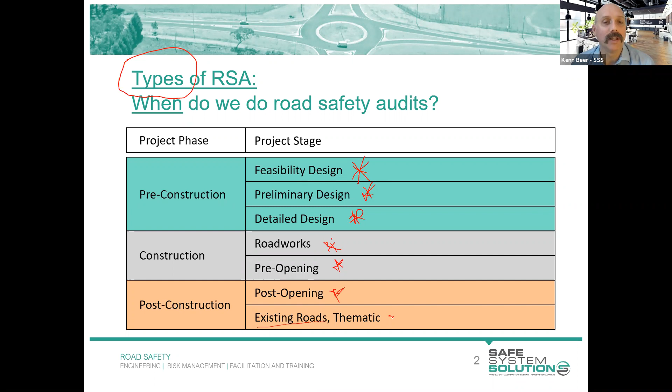What we want to do in this session is talk about the steps within any of those road safety audits. We use the same 8 steps within any audit, be it a detailed design audit or a construction site audit - it's the same 8 steps. You're just dealing with different information to be able to do your audit. So we're going to define those, have a look at them, and point you to where you can get further information. Then we'll dive into the first of our specific road users we'll have a detailed look at - today we'll be talking about pedestrians and safety considerations when road safety auditing for pedestrian safety.

Okay, so road safety audits - it's a fairly straightforward process, and once you get to know it, it becomes run-of-the-mill doing these audits. It's got 8 main steps that we go through. It does take time, there's no getting around that, because you have to go through these 8 steps, and if you've got a large design set, you need to go through that with a fine-tooth comb. They really do add value to projects at any stage, and need to be an integral part of a design process - that independent check, the audit, to ensure and guarantee the safety of the public.

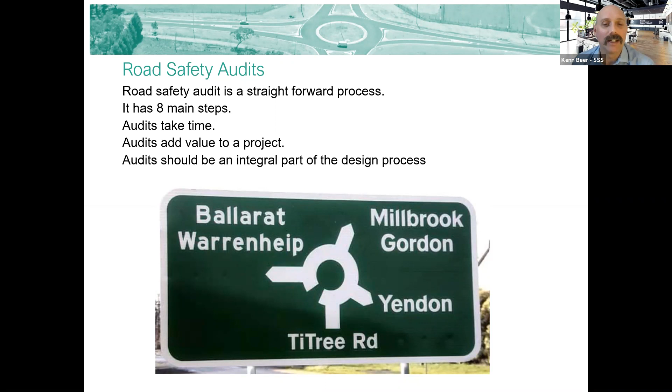So this diagram is from the Austroads Guide to Road Safety Part 6A, which is where you go to get information about how to do a road safety audit - the process of auditing. You don't get all the details of everything you might find as an auditor, because that's limitless and requires a whole lot of knowledge and continual learning. But the steps are laid out in this diagram, and I'm going to go through each of those with you.

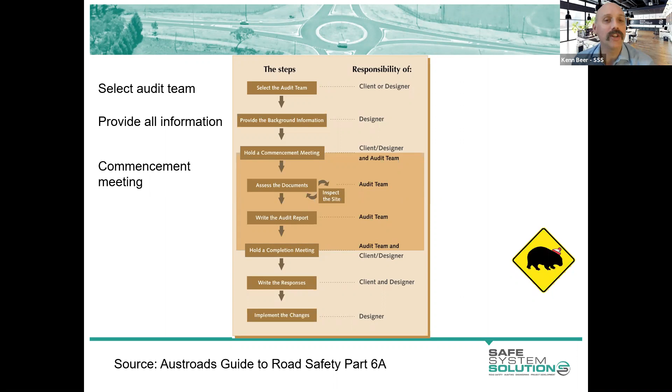But they are essentially to select the audit team - the client is going to do that, or the designer or the project manager, and they're going to get their audit team. They're going to give them all the information they need to do their audit. There'll be some sort of commencement meeting or information exchange. The audit team will then look at the documentation in detail, then inspect the site during the daytime and the nighttime. They'll write up their audit report, and there will be some sort of completion meeting or handover of the report and findings. Then the designer, project manager, or client are going to have to respond to the audit report. I'll talk to you a bit about each of these in more detail and how they actually play out.

But those are really the steps that we go through. This last one here is really critical to why we do audits - that something is implemented. If there's no intention to ever change anything in the design, getting an audit done is a waste of everybody's time and resources. We need that genuine desire to improve things and be open to implementing changes as the auditor recommends, as long as they can be done within the scope of the project. So I really get quite annoyed at audits that are an absolute tick box exercise, and nobody ever had any intention of doing anything with the audit when it came in, apart from putting it on the file and ticking the box to say they did an audit. If it's gone down that track, just don't waste the resources in doing that.

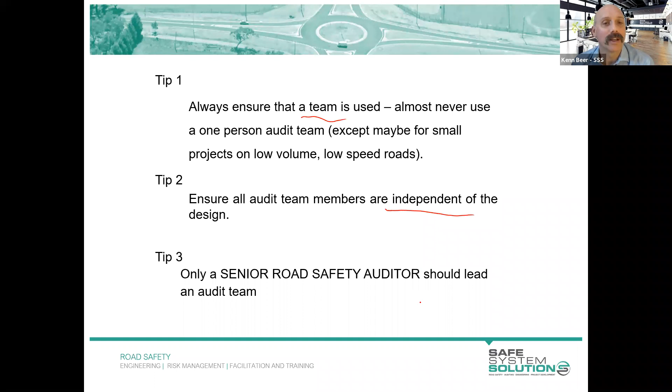Now, in an ideal world, your team will be quite varied. They'll have a broad set of road safety experience. There'll be a mixture of professions, mixture of ages, empathy with all road users, male and female perspective on things. So that would be ideal.

In practice, it's sometimes hard to pull that very diverse team together, but this was a team that I was doing an audit with. It was actually a thematic road safety audit, a motorcycle audit, and we had the three of us there doing the audit, all male, all about the same age, and all with a fairly similar background, traffic engineering and the like. So we asked Wendy to come along, who comes with a very different perspective of things, and add that diversity to our team. In fact, Johan, who's there, is in this course. So there you go.

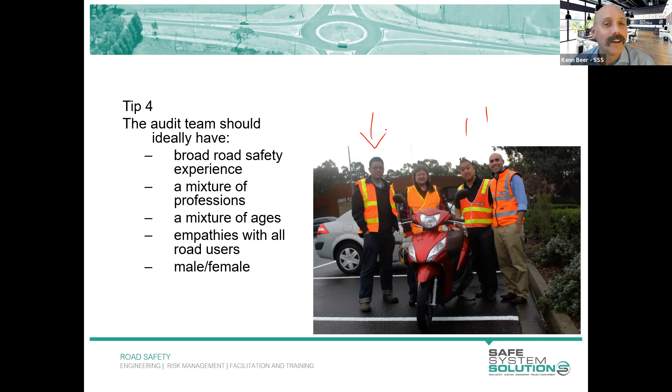So you want to then assess the documents, and as I mentioned, this can take a long time. If you're pouring through a 500-page design set with the full works, you're at your desk for a long time, and you might have multiple people doing it, so you're picking up different things.

For me, when it's these detailed design road safety audits, I tend to get our real design experts involved, who are good road safety auditors as well. The reason for that is they're able to quickly pick up geometric deficiencies out of a 20-page cross section within about 10 minutes, where it would take me days and days to pull that all together. So this reinforces the importance of pulling that team together of varied expertise.

You want to inspect the site during the daytime and the nighttime. There may be specific circumstances where your client, the designer, or the project manager specifies we don't need a nighttime inspection. They might do that to try to save some money on the audit, though it doesn't save them much at all. Maybe it's a speed thing, wanting it done in a quicker time. The Austroads guide does have a little get-out clause saying that in some rare circumstances you could skip the nighttime inspection, but it pretty much says you should be doing one.

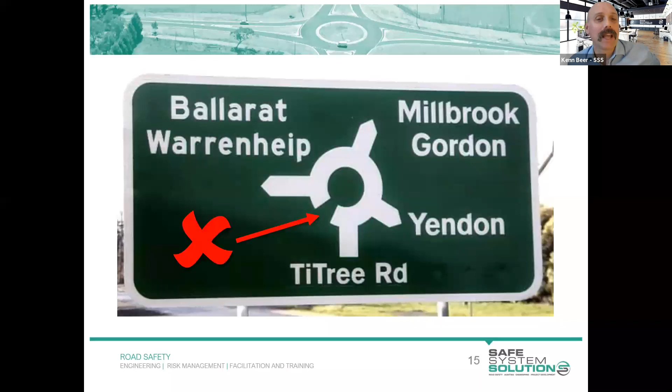I might do that with other things as well, like things that are not directly road safety related for some reason, could be a land acquisition issue or something like that. I might say 'to note' - just flagging with you that this issue is there - instead of risk rating it as one of those specific findings. But you can put that in there as low risk if you believe it's low risk, or you might even bump it up a little bit.

The thing is with this sort of stuff, it gets changed - it's easy to change, and that's a good thing. Yeah, so this one got rectified. In fact, I usually have a photo of the rectified sign - after I ran the audit course in Ballarat and showed them their sign, they got out there, and within the course it was fixed, which was good.

So then you go and write your road safety audit report, and there is a general template that is used, and we want that consistency in auditing. We've provided you a Word document template of an audit report that conforms with the Austroads Guide to Road Safety Part 6A there in Moodle on your memory stick.

So you've got one you can use to ensure you're covering off all the things that should be in there. When we get to the point in this course when you go out and do a road safety audit, you're going to use that and fill it out. We happily give that to you because we want that consistency - we want you to use it going forward, put your own branding on it, and use that general format.

Then we want to see in there a description of the audit and the stage the audit's undertaken, a list of the information provided to the audit team. This one is really important - list not just what was provided, but the details of it, in terms of the design number, the revision, and the date of that design.

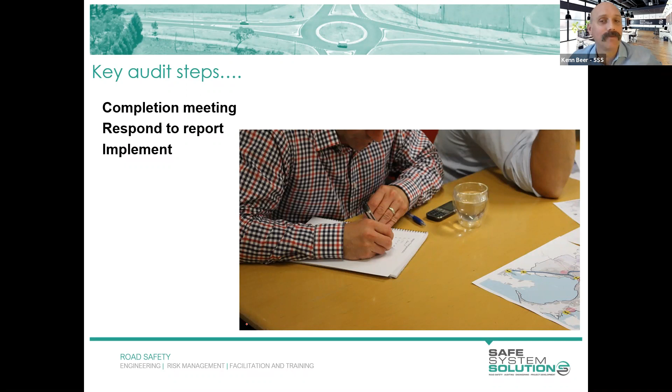It's really good practice for that to be fed back to the road safety auditor, so the auditors have got that full rounded picture of what's going on, but there's no specific requirement. The auditors are simply handing over advice to the project team, and it's up to them as to what they then do with that. But as we talked about, we want to implement, hopefully.

Yeah, so when it's given over to the project manager, this report or the designer, it's important that everybody keeps file copies of that. It's an official document, and can and does get used down the track.

So the project manager is required to respond. It's a vitally important step, and that's what I was talking about, where sometimes it's a tick box and an audit report gets handed over and they just pop it into the file and carry on. But it really needs to be something that's done.

The project manager, the designer, when they get that report, a few little things if you're in that situation: your response may become public, be aware of that. So it's probably thinking about the language you use and how you respond to different things. And it's good to respond to the audit team - that's good practice, it's not absolutely required.

The audit has been done to reduce the risk of a project. And there's a misunderstanding, I think, a common road safety audit misunderstanding, that anything the auditor says must happen. That's a misunderstanding - no. The audit is a report that is there to assist the project team, to advise, but it's their project. So if you're the project manager, the designer, it's your project.

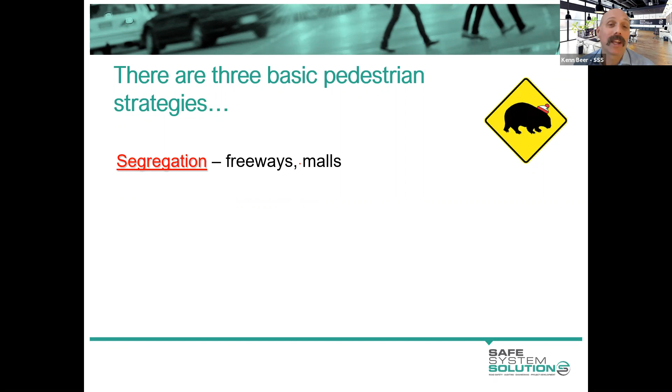So there's these general strategies, these three general sort of broad categories of ways to cater for pedestrians. We've got segregation, separation, or integration.

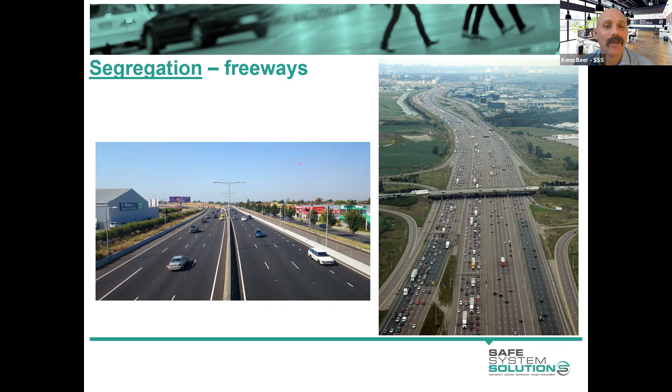And what these are: things like freeways or malls when we're segregating. This is an area where pedestrians are not allowed, right? And you try to do everything you can to keep them out. We may also have it the other way around. This is an area for pedestrians, and we keep vehicles out as much as we can.

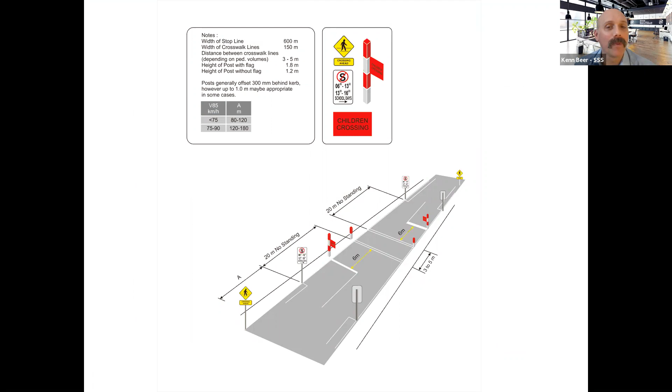Separation is where you're often using the same piece of road during one time for pedestrians like this, and then at another time, very shortly after, it will be used for vehicles. So that's that separation in time. School crossings are also trying to be in that category of separation in time. So we shouldn't have the two using the same thing at the same time. These types of crossings where people go all different directions also, again, separation in time.

Now, I'll give a prize out for the person who can tell me the name of a crossing where you're able to cross that way, or that way, all at the same time. And I want the, I suppose, official term for it.

There's a so there's a couple of terms. My favourite is Flinders and Elizabeth by Adam. Is that the official term? That there is one there. Well done, Adam. No, so I'll give two prizes out for this. I'll give the sort of generally commonly known term, which is a scramble crossing. So whoever got that, I see that's come in a few times. But there's another one which is a bit more obscure.

Does it involve dancing, Kenn? It does involve dancing. It's the name of the person, I think, who came up with it in the UK originally. I'll let that go. See if anybody comes up with that. Yes, Rafaela has got it. It's a Barnes dance. Well done. I think Rafaela might do very well in one of our traffic engineering trivia nights. Those are all sorts of fun questions. It's called a Barnes dance. Yeah, I'm pretty sure a guy called Barnes, or maybe it was a lady called Barnes, came up with that in the UK quite a while back.

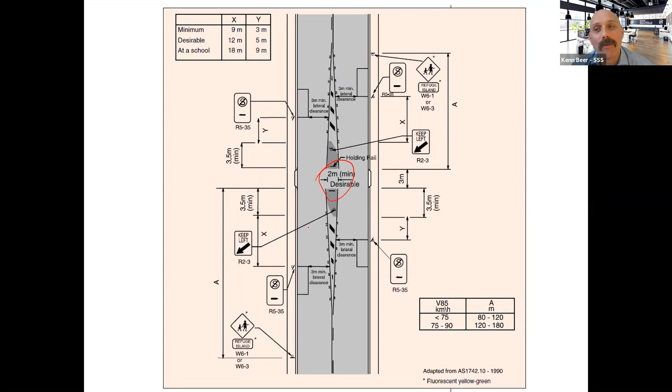refuges in the center of the road or sidewalks to separate the space there. Now, here's one which I suppose is a classic road safety audit thing to look at, and it's what sort of space are we providing in a refuge? And is it enough? Now, I like to use a rule of thumb on this one, and it's simply: if a father or a mother is pushing their pram along, don't make them decide whether themselves or their child has to be sitting in live traffic.

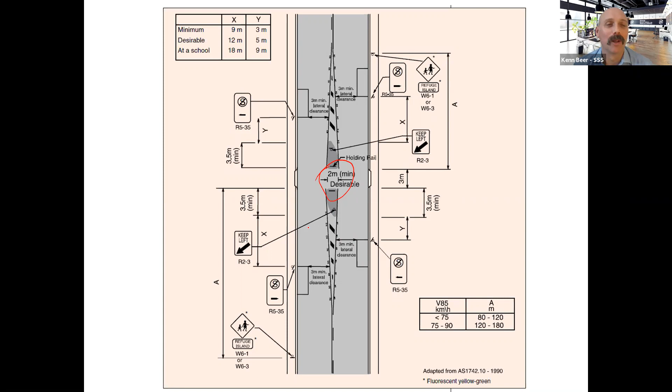That's a pretty good rule of thumb. Some people like to use a bike. If you're on a bike and you're storing in the middle, is there enough space? But you'd also need to think about how many pedestrians are using this, and will they be congregating there, and is there enough space from that perspective? And we also need to think about mobility scooters and other sorts of mobility devices, obviously wheelchairs and those sorts of things. And are we providing the facilities for those?

And what we find is that if these are not put in places that are easily accessible in the right ways, they can be a large waste of money. And we still see a lot of pedestrian trauma in some circumstances. If they're designed well and they're in the right place and they're easily accessible, they're wonderful. Absolutely, you're eliminating the conflict points. But just be very thoughtful about that.

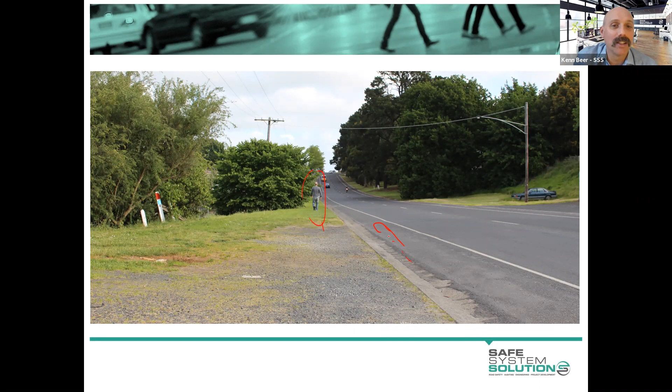As an auditor, this is easy stuff. You obviously want to provide facilities for pedestrians so they don't need to utilise road space. But you've got to think about it not just as 'oh well, this pedestrian looks like they're able to walk along there' - think about all those using the road.

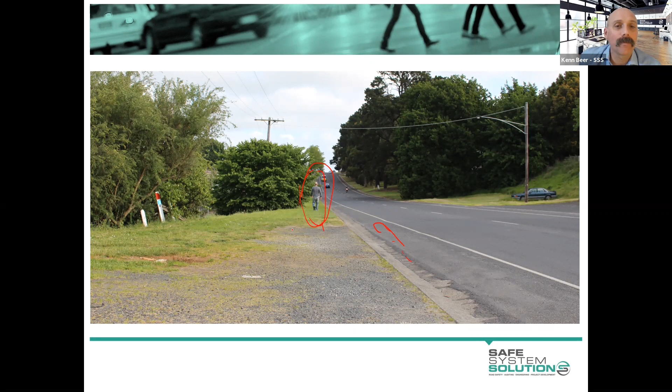There's another one - we're seeing an elderly pedestrian wandering along there. If they were using their mobility device, or it was really muddy there, they really have no alternative but to be walking on the road.

The other thing we use, and it's a term as well as a principle that we use a lot as road safety auditors, is this thing called the desire line - a pedestrian's desire line. It's simply the straight line between the point they're at and the point they want to be. That's their desire line. Pedestrians are a road user that will not budge off their desire line more than any other road user - pedestrians hate getting off their desire line.

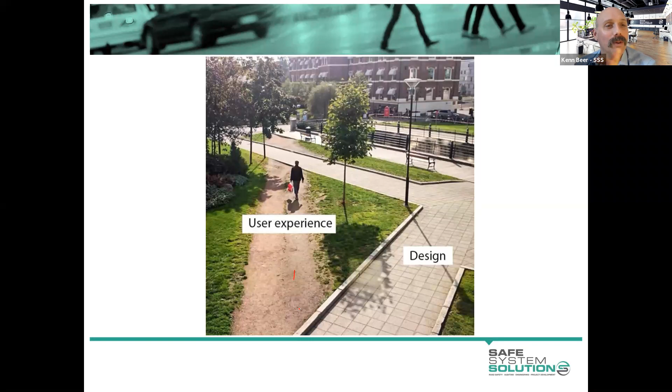Some more examples - I think we've got the point here, even though it's a bit hard to see. The desire line is obviously there, but there are no facilities. This was me taking a group of engineers out to look at cyclists and two-lane roundabouts, which is a topic for another module. There's no facilities provided whatsoever in that design, so we have to think about that - pedestrians will make their way if they want to.

This isn't in Australia, but it's a common thing - if a community on one side wants to get to the other side of a major freeway you've put in, they will, and they'll cut holes through the fences you put up. This is a bigger picture planning issue. If we can get in at the feasibility stage and provide these facilities from the get-go, we're in a much better position. When doing major road upgrades, pedestrians have to be front of mind in consideration for these things.

How are we going on time here? Okay, it's about 11:10. What do you reckon, Kathy? Should we have a little stretch break now and get back into it? Yes, good idea, Kenn, two minutes? Two minutes, have a stretch. Fill up your water if you want, or your third coffee for the day, and we'll get back into it in two minutes. I'll have a stretch and we're ready to get back into it.

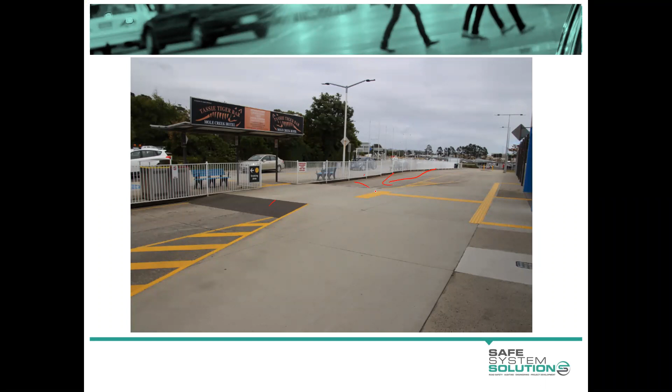Sorry, just a couple of questions have come through regarding, or probably back one - can we use humps in arterial roads with a speed of 50 kilometres an hour? Yes.

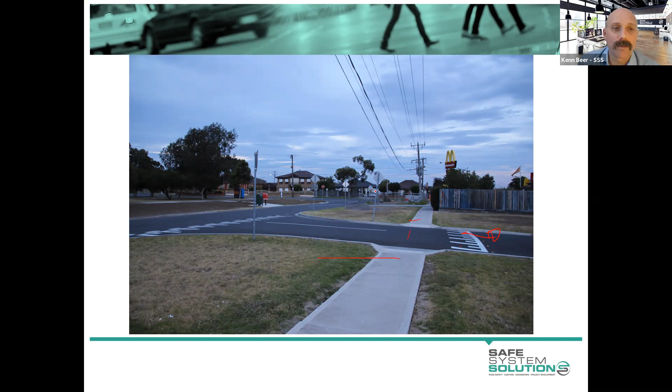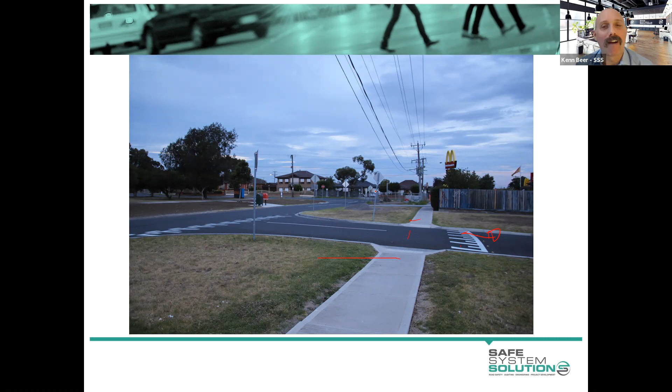And another comment has come through saying, I feel these raised speed humps are confused with wombat crossings, which include zebra crossings. Correct - a wombat crossing is the Australian term for a raised pedestrian crossing, a raised zebra crossing. Absolutely, and that's the confusion, the potential confusion with something like this.

So spot on. Now, I answered that - can we use raised things on arterial roads 50 kilometres per hour? And I just said yes. Well, I should go a little bit further than that. There is very good guidance available on how to do vertical deflection - that's anything raised on an arterial road with speeds of those magnitudes or higher.

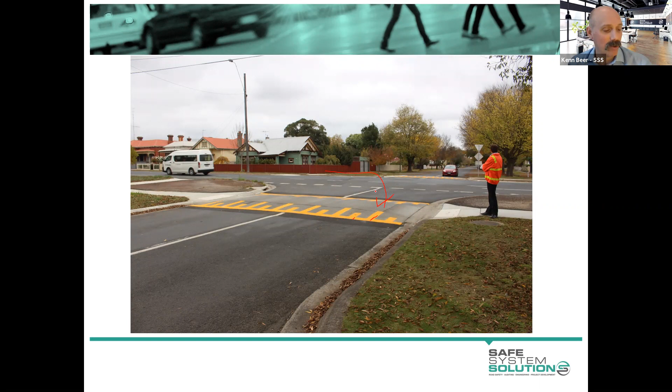So there's two main things I'd point you to. There is a very recent Austroads document that has come out giving specifics on how to do these raised things - raised intersections, raised road safety platforms, we'd call them, on those high-speed arterial roads. It tells you what grades to use to gain different speeds, how to sign it, how to line mark it, where to use it, how to think about drainage, all sorts of wonderful bits of information. A lot of that's come from the Victorian Road Design Note - the number's going to elude me, RDN 0307 I think it might be, but you can Google it, or we could even send it out to you. It has a lot of great information as well. So yes, absolutely, vertical deflection on arterial roads is very much what we can do if we believe it's warranted.

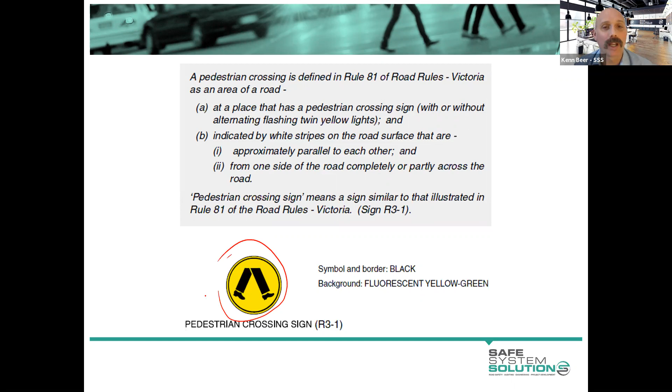So this sort of stuff, again, it's just confusion of priority - I need to harp on that. In Victoria, at least, and actually across Australia and New Zealand, in order to get that genuine pedestrian priority, you need to have the walking leg sign. This is for a pedestrian crossing or a zebra crossing - it has to have the walking leg sign, and it actually has to have the line marking as well. So this one technically wouldn't comply - there's no actual crossing markings. So you need that and the crossing markings as well. So here's the setup you would actually need.

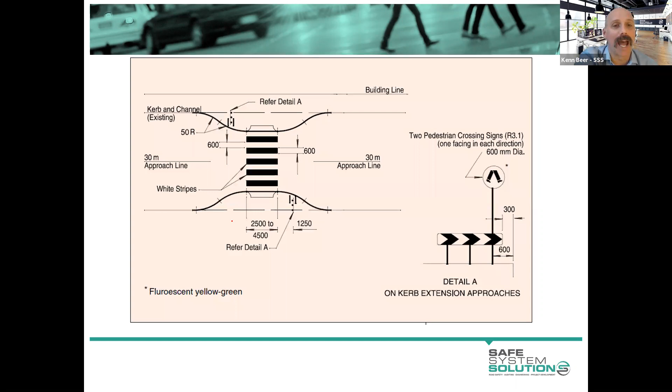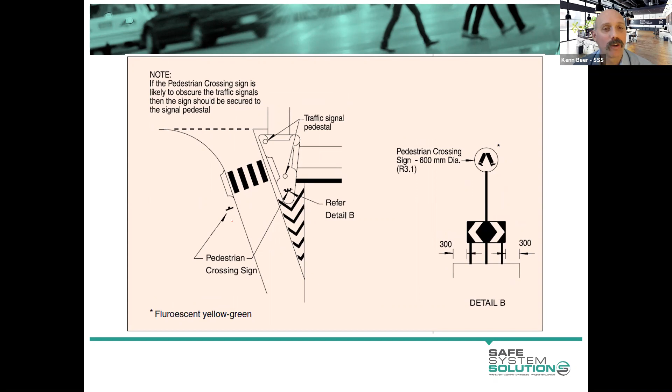And here's potentially how it could be done on a slip lane, although we talked about slip lanes and the challenges there. I am not a fan of an at-grade pedestrian crossing, with no raised nature, on a slip lane at all.

And then we get into the details of specific use of incorrect signage and the like, and it all is stuff that as auditors we should potentially be picking up, whether we mark these as risks or we note them, but we want to get this consistent and clear, and it's an overarching importance in road safety.

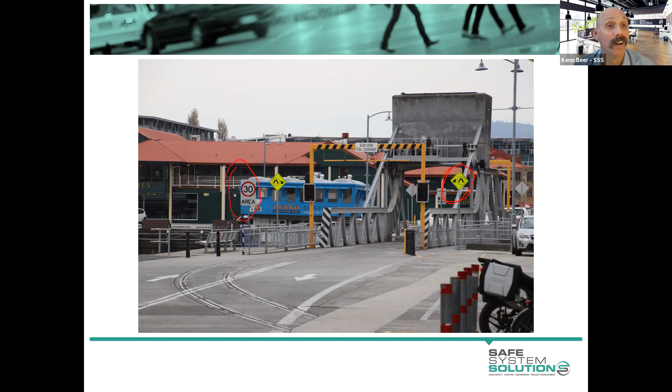This one I had to chuckle at, and well, then I had to call somebody at the council because I stopped chuckling. But whoever installed the signs on this pedestrian crossing was using the signs to show the pedestrians where to cross, rather than pointing those at traffic to show that there was a pedestrian crossing there.

To me, that's an example of what we've kind of got to be expecting we're dealing with here. You're probably looking at that and going, how could anybody get that wrong? But these are people who install these signs for a living, and they've done that. So let's not expect too much out of people, and make sure we're going out and auditing post installation.

We're checking these things, doing existing conditions audits and the like to try to ensure that this sort of stuff is weeded out. Again, what's the risk level of this? This one's probably a little bit more risky, but still the speeds are quite low in this environment, and things are probably operating somewhat like a shared zone anyway, but nonetheless, it's just wrong.

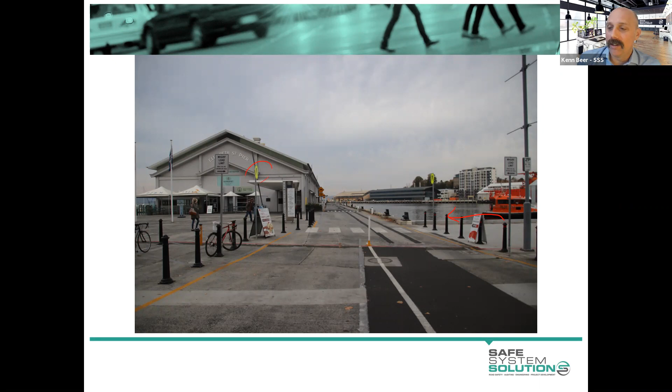Okay, let's do a little exercise. We'll do a couple of little exercises actually in our last 20 minutes or so.

Now, you're looking at this from a design stage. If you're a designer and you're looking at it, what sort of small alterations in the design of this do you think you could do to make it safer for pedestrians utilising that facility? There's some little design tweaks that could be done. Pop that into the chat if you've got any thoughts, any ideas on how this could be altered at design stage to make it safer for pedestrians.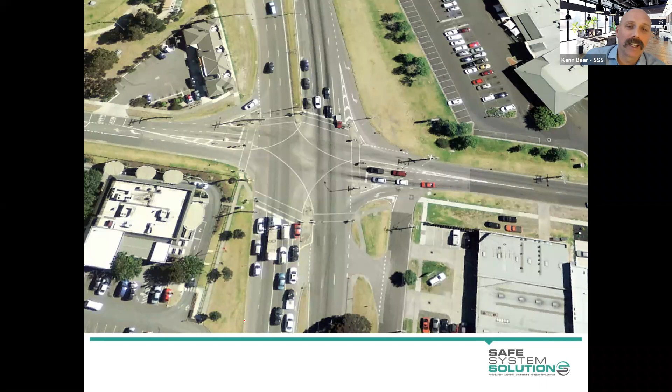All right, time for a little exercise for this wonderful group. Here we go, got an intersection here. It's an existing intersection, actually been reconfigured since, but it's obviously two high-speed roads intersecting in an outer suburban area. I want to give you a little quiz, which you'll do using the poll. It's fairly simple, but it's going to require you to study this plan a bit.

So we will do a quiz. Don't pop it up yet, Kathy, just give me a second here to explain what we're looking at. Four serious injury crashes have occurred at this intersection, involving pedestrians being struck in exactly the same way.

Your challenge, which we'll do via the poll, is to guess which of these crashes that I've drawn up is the one that has the four pedestrian serious injury crashes, all the same crash type. Okay, let me take you through them.

One: a vehicle turns in from this lane and the pedestrian is crossing this way. In crash diagrams, we tend to use a dotted dashed line for pedestrians and the vehicle turning in. The second one is the pedestrian walking out here and the vehicle turning onto it there. The third is the vehicle coming into this slip lane and the pedestrian crossing there and being struck. The fourth is this slip lane where the pedestrian's crossing from the island out to there and the vehicle strikes it there. And the fifth is the vehicle turning into this facility here and the pedestrian walking along there.

So we'll pop up the poll, and all you need to do is vote on crash location type 1, 2, 3, 4, or 5. Remember, you're not being marked on this, it's just a way for you to have a think about it. I'll give you a second to scratch your head and ponder each of those. If that poll has popped up on top of the map, you can just pick up the poll box and move it around your screen so you can still look at the aerial image. Yes, you can move things around your screen windows as you like.

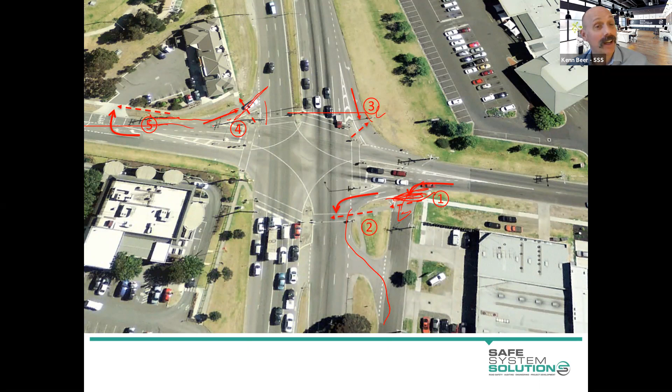And those are the sort of things you want to do as an auditor, trying to pick all of this apart and providing recommendations before any of this is ever built. Or if it's existing, pointing all of this out and seeing what maybe can be done to alter this intersection to improve safety. Now, we were just focused looking there at pedestrians, weren't we?

And just at a couple of locations. You've got to think about all the locations for pedestrians, and then for cyclists, and for motorcyclists, and for passenger vehicles, and for heavy vehicles. And you've got a lot to do in one intersection, don't you?

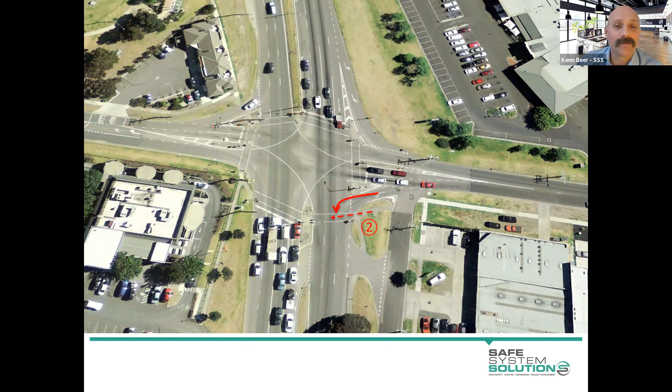The other thing to think about is that time of day. If you're road safety auditing an area and it's going to have lots of pedestrians or lots of other road users at certain times of day, you really want to see it operating during that time. So take a route to school, for example. You really got to get out there at the end of school, start of school time, see how it operates to understand the volumes we're talking about and the specifics of it.

So get out there during those certain times. If you're doing an audit around the local football stadium or something like that, it's ideal to see it just after it's operating, before it's operating with a home game and a big crowd. Now, practical reality may mean you can't actually do that. Your audit's due in a fortnight and there's not a home game for another month or something. So you may not be able to, but it is ideal to be able to see that.

The other thing I like to do as a road safety auditor - I'll leave this one up to you - it usually happens that the audit team goes out there, high-vis vest on, everybody's got clipboards, and you're standing out there on site, and it doesn't take long for some member of the public to wander up and ask what's happening, what's going on. I tend to say, oh, we're just having a look at this intersection. I don't say that council's engaged us to look at it, or department's engaged us, or whatever. I just say I'm having a look at this intersection.

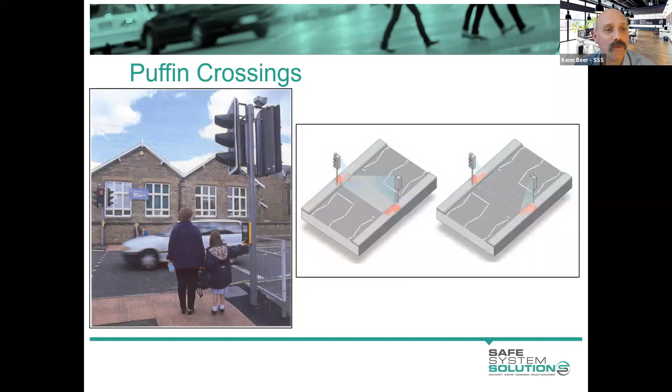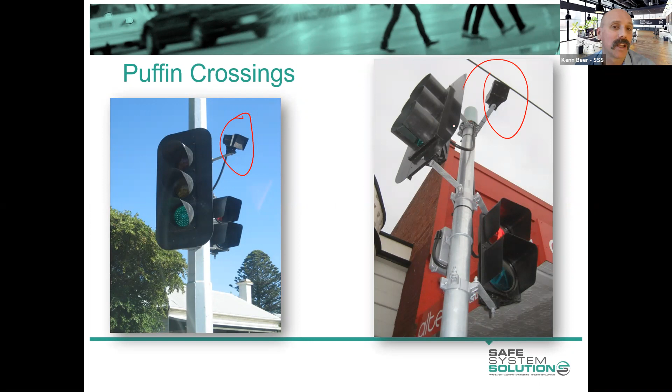Puffin crossings - pedestrian user-friendly intelligent crossings. Basically, when you walk up to a house at night and the lights come on automatically, it's the same technology, just put into the traffic signals at the pedestrian crossing, and the lights stay on red if there's movement on the crossing. So it's a device that can be retrofitted to crossings and holds that light red while there's movement. That's a great feature especially for slower or elderly pedestrians crossing - you can hold the red. It's a good feature.

Toucan crossing - so you might notice there's a bit of a bird theme going on here. Somebody must have decided back in the day that pedestrian facilities will go with a bird theme, and people have stuck to that. The toucan crossing is where you make it so both a pedestrian and a cyclist can cross - two can cross. Yeah, they must have been having fun naming these things.

A pelican crossing is basically where a driver will see a red light as the pedestrians are crossing, and then instead of jumping straight to green, it goes to a flashing amber light. It flashes for a while, usually supplemented with 'give way to pedestrians when light flashing' or similar. That's just to give extra time. But if it's safe and there's nobody still on the crossing, drivers can proceed through, and then it goes to green.

There's quite a few of those around - Victoria certainly, Bendigo's full of them, the Balwyn shops, lots of those, and in different places. So they're a pelican crossing - that one stands for pedestrian light controlled crossing. Pelican crossing.

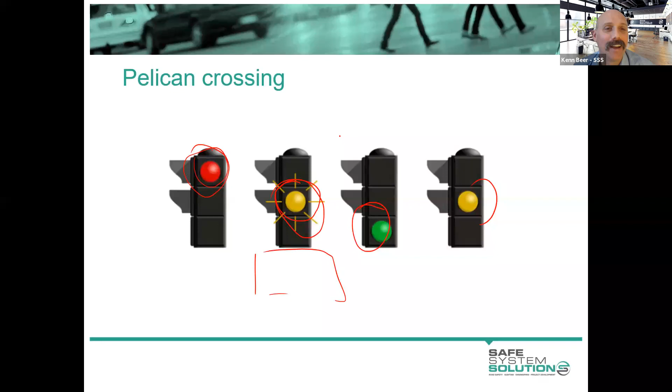There are Pegasus crossings as well - a horse is technically a vehicle in most jurisdictions, so that's providing a specific facility for that vehicle.

A little bit of random trivia for you here, which I know you're enjoying - it is illegal to ride a horse when you're intoxicated, because that's actually technically drink driving. But it is actually not illegal to ride an intoxicated horse.

I really need the hilarity of laughing feedback from the group, which I don't get when it's online.

It wasn't that funny, Ken. Oh, somebody's given me some laughs. Thank you, you're too kind, people. Don't encourage him. I think it may be highly illegal to get a horse intoxicated, but if the horse drinks by itself, that's on the horse.

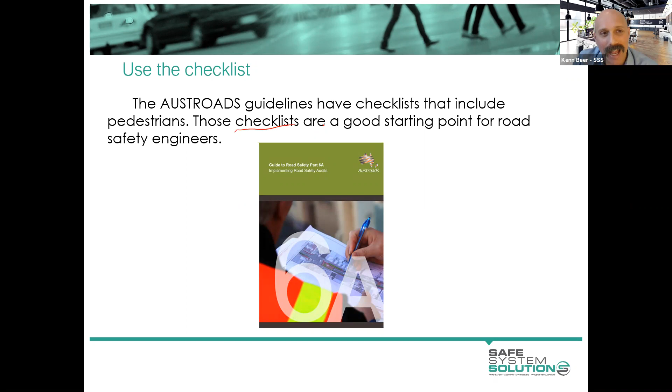And in fact, you will be utilizing those checklists when you do your mock audit. Those checklists cover off pedestrians, cyclists, motorcyclists, heavy vehicles, and alcohol. So you've got a bit of stuff to help you.

Let's do a final quiz, Kathy, and then off we go. I think it's a little quick, easy one. I think we might be out of time, Ken. I think it's at the bottom of the list, Kathy, if you're looking for it. Oh no, you're right, damn it. Okay, there it is on your screen now. Ken's got me again. Which of the following is not one of the three infrastructure strategies for pedestrian safety? Is it prevention, segregation, separation, or integration?

Thinking very much back to what we talked about at the start, we've got some general overarching strategies for pedestrian safety, and you can categorize things, which is not one of them.

Just got a few more people to put in their votes. We might get 100% all round on this one, I think. Oh, getting close, couple more people diving at their keyboard as we speak. Give it five more seconds, and I'll close that off.